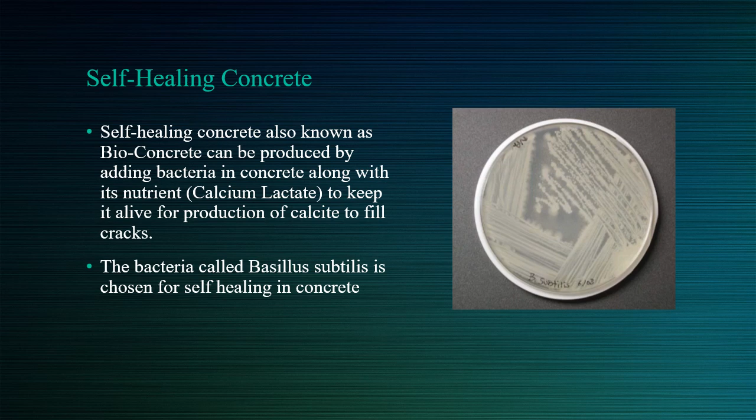The bacteria used is Bacillus subtilis. The point is, why Bacillus subtilis? Because it's able to adjust to the alkaline atmosphere in the concrete for the production of calcite. It also produces copious amounts of calcite without being affected by the calcium ion concentration.

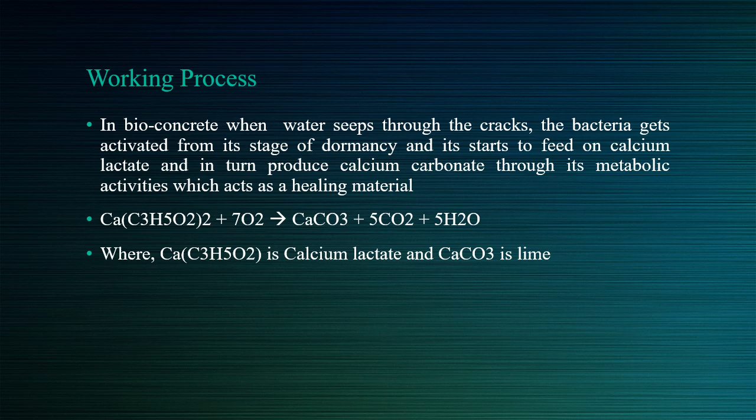The working process is: in bioconcrete, when water seeps through, the bacteria get activated from their stage of dormancy, start to feed on the calcium lactate, and in turn produce calcium carbonate through their metabolic activities. The reactions are as follows.

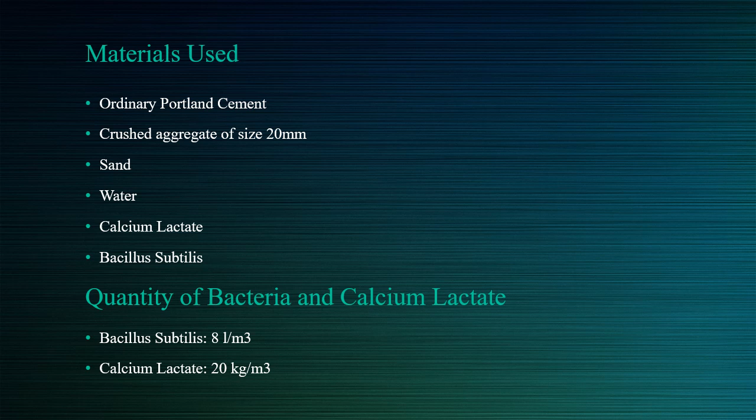The materials used are ordinary Portland cement, crushed aggregate of size 20 mm, sand, water, calcium lactate, and Bacillus subtilis. The quantity of Bacillus subtilis used is 8 liters per cubic meter and calcium lactate is 20 kg per cubic meter. And the surface healing of cracks: the crack widths are measured at different points and marked for observations of self-healing.

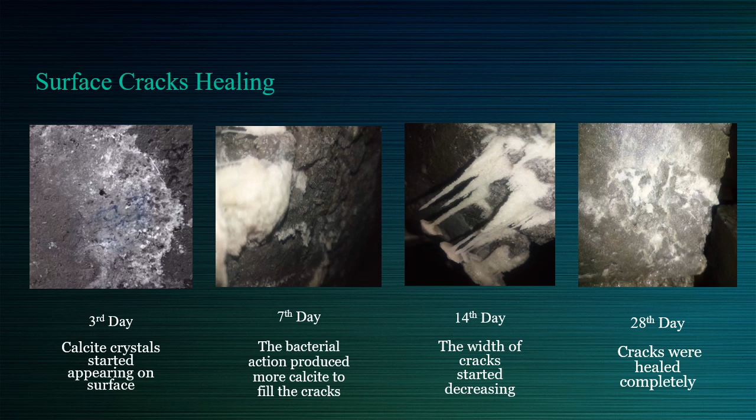As we can see, on the third day, calcite crystals started appearing on the surfaces, and on the seventh day, the bacterial action produced more calcite to fill the cracks. On the 14th day, the width of the crack started decreasing, and on the 28th day, the cracks were healed completely. The widths are measured, and the difference between the original crack width and that observed on later days was considered as a measure of self-healing.

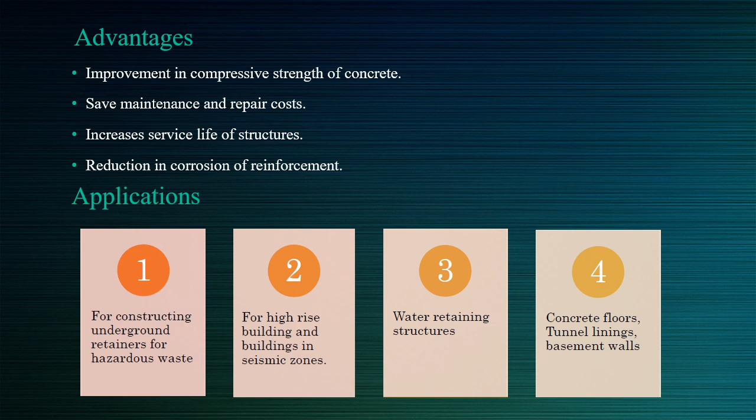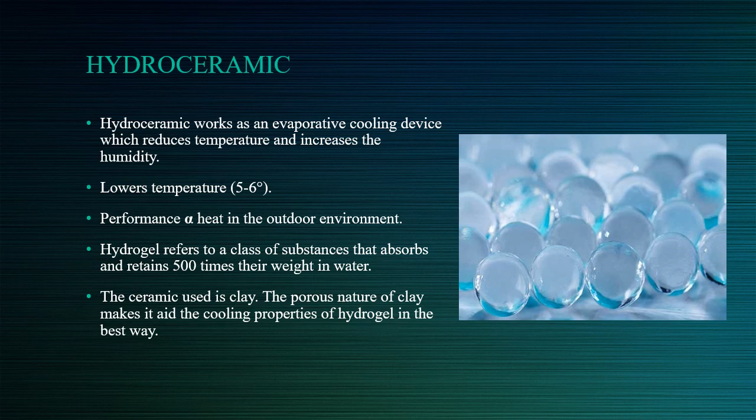Hydrogel refers to a class of substance that absorbs and retains 500 times its weight in water. The fabrication process: the structure of the prototype is like a sandwich. It begins with an outer layer of clay which is baked at 1000 degrees Celsius. The surface is filled with cone-shaped holes that allow excess water and air to pass into the hydrogel.

The first layer can also be called the clay breathing layer, followed by a cloth called a stretching cloth. It absorbs water, works as a transmitter of liquid, and allows volume changes in the hydrogel while holding it in position. The final layer is also made of clay, but it's thinner and perforated so the cooling increases.

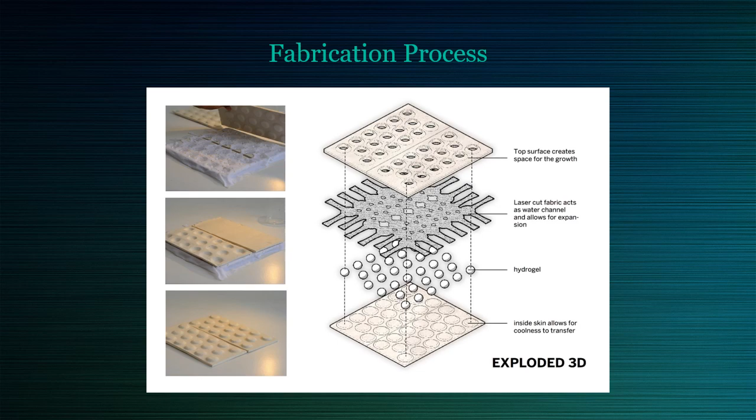The final mechanism is similar to the passive mechanism of earthenware pitchers, as you all are aware of, and the test setup consists of a piping system, which in its proposal could be with a tank that collects rainwater as a harvest, and it is followed by the perforated box compared to the control. After being treated with extreme heat, it resulted in a 5 degree difference in temperature. The advantages are it saves up to 28% of overall electricity consumption caused by traditional air conditioning, and it is also a low-cost alternative building technology.

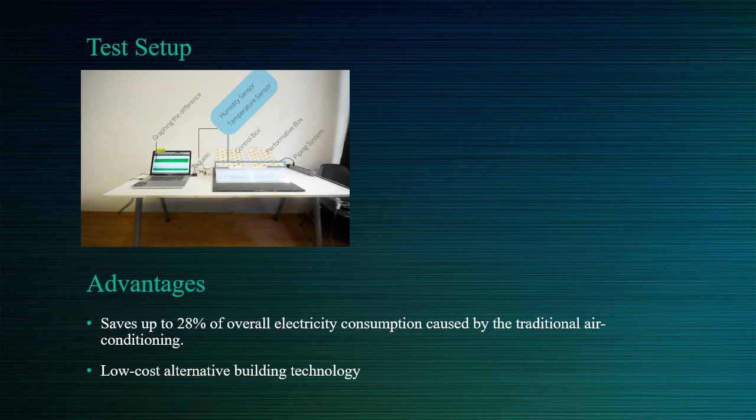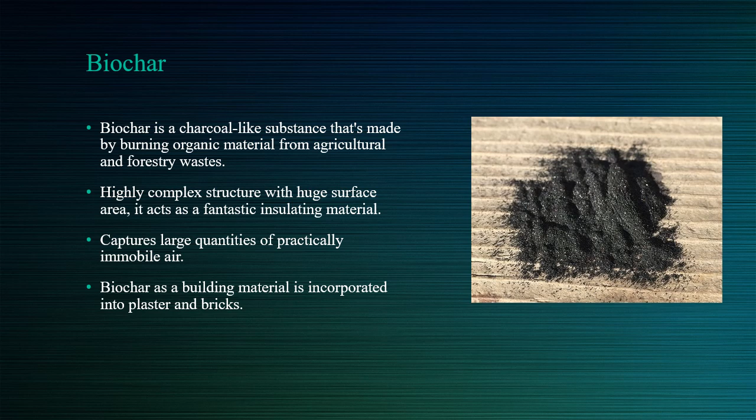And coming to biochar, it is a charcoal-like substance that's made by burning organic waste from agriculture and forestry. It is a highly complex structure with a huge surface area, and it acts as a fantastic insulating material. It captures large quantities of practically immobile air. Biochar as a building material is incorporated into plaster and bricks. This creates indoor plaster with excellent insulation and breathing properties, able to maintain the humidity levels in a room at 45 to 70% in both summer and winter.

The properties of biochar are that it has low thermal conductivity and absorbs water up to 6 times its weight, and the advantages are it improves air quality, it soaks up moisture, it has insulating properties, it protects from radiation, and it allows buildings to be turned into carbon sinks.